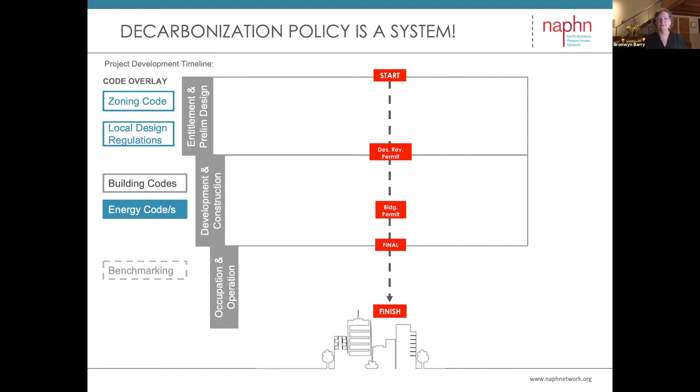So if we look at the typical code compliant building progression, it's everything that any architect or owner and developer and policymaker is familiar with, the typical phases of project development. And what I'm really wanting to point out is where the energy codes and these policies actually intervene in this development timeline. And for typical code compliant buildings, in most regions, the energy code really only affects a building right before a building permit is pulled.

Some projects might push this a little bit further up the development time frame, but for the most part, we know that energy codes really are only required to be developed and calculated right before a building permit is pulled. And if we then look at how passive house buildings are developed and where the passive house energy model intervenes in the system and the time scale for how projects are developed, we see a little variation.

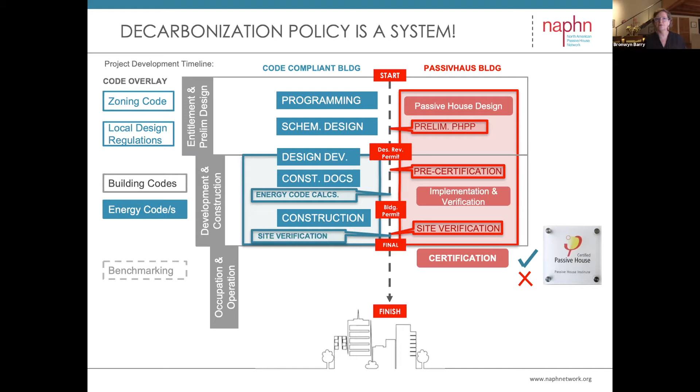So the other upstream intervention that we absolutely have to review and should not be left out of this discussion is the zoning code overlay. Any decarbonization policy that does not look at how land use is distributed and regulated is missing a huge opportunity to decarbonize their built environment simply by allowing more density to be developed. And this is a really simple function: the more disjointed and disconnected your buildings are from each other, the more insulation they require.

So your detached single family homes, forms that are broken up and have a lot more surface to volume ratio, actually require much more energy to operate, and they require more insulation. So a very simple lever for decarbonization that can have a huge impact on your built environment would be to simply allow higher density, more compact buildings, and for them to be ganged up together as in multifamily buildings.

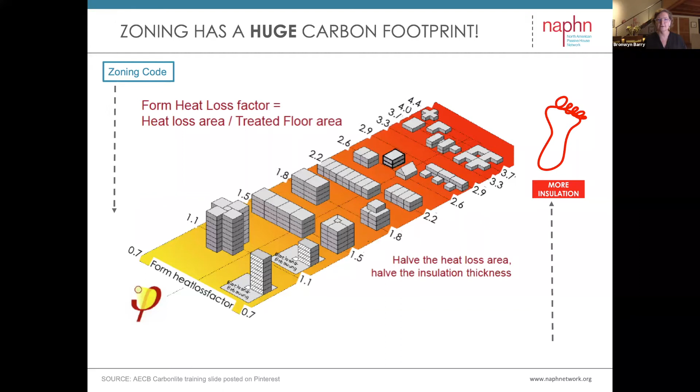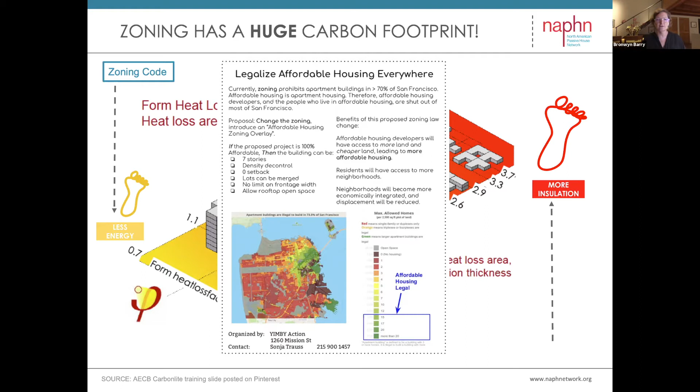And just to illustrate the point, this is my city, San Francisco, and San Francisco is one of the better cities in North America, and yet we still only allow multifamily buildings to be built in less than 30% of the area of our city. So this drastically alters the opportunity for us to decarbonize. And in our policy resource guide, Matt Hutchins wrote a fantastic article about this exact topic. And although it may not be specific to passive house, it greatly affects how efficient and cost effective passive house buildings can be. So start always with zoning.

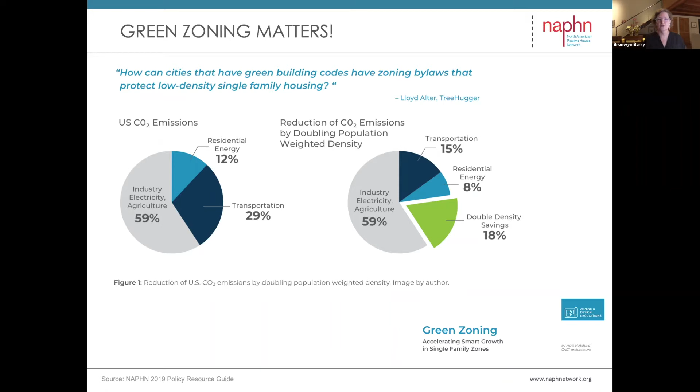This graphic that he included in his article shows how not only can you double the savings if you double the density for your housing, but you actually can also halve the transportation footprint. So the CO2 emissions from transport actually also benefit. And it is this doubling and coupling of efficiencies that again is something I will touch on a little further in this presentation.

And I'm always amazed that this is never required to be reviewed through a carbon emissions lens. And for the most part, what I see is these local design regulations that give guidelines for creating these completely disjointed, overly articulated boxes are actually sabotaging all the other good work that you are attempting to achieve in your building energy codes. So make sure that you aren't killing your carbon action plans by having your well-intentioned planning and local design guidelines folks really requiring all of this ridiculous articulation.

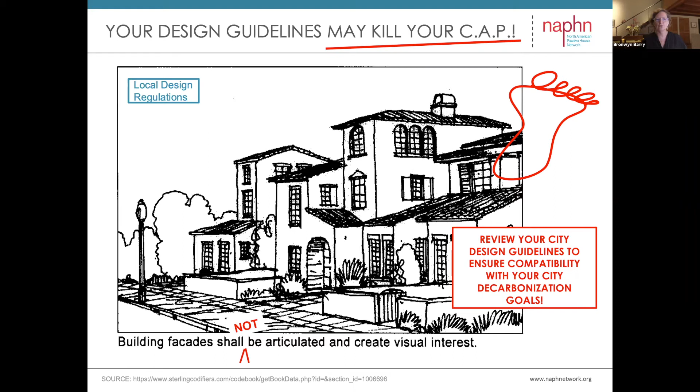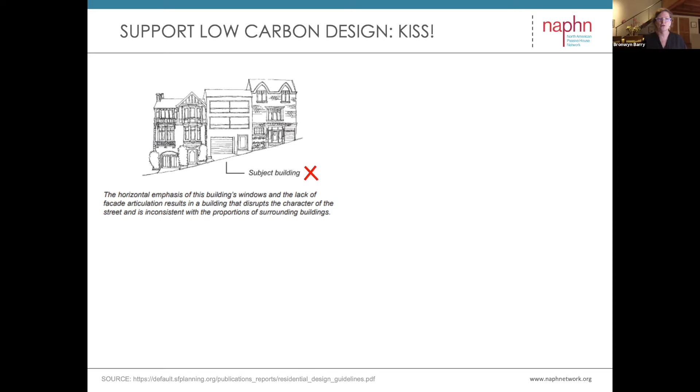And again, this is what's required in San Francisco. The design guidelines show this subject building as the unsupported version, but the version that they are encouraging architects to deliver is also actually horrendous. If you recall the slide I showed with how complexity and additional surface to volume ratio really increases the amount of insulation required and the amount of energy used, this is really not a good idea.

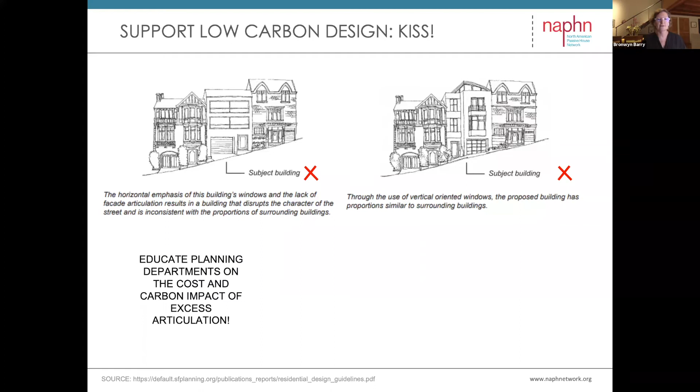So I encourage you and I urge you to make sure you educate your planning departments on the cost and the carbon impact of excess articulation. And perhaps there is a third way that can be found that still does create a unified, integrated neighborhood character, but really this may not be the best design that I can create with the PowerPoint shapes tools. But really the point I'm trying to make here is find a third way, keep it simple, and make sure your design review guidelines are also viewed through a carbon emissions lens.

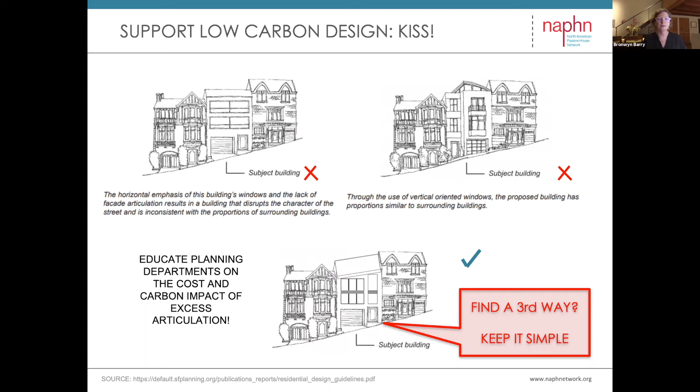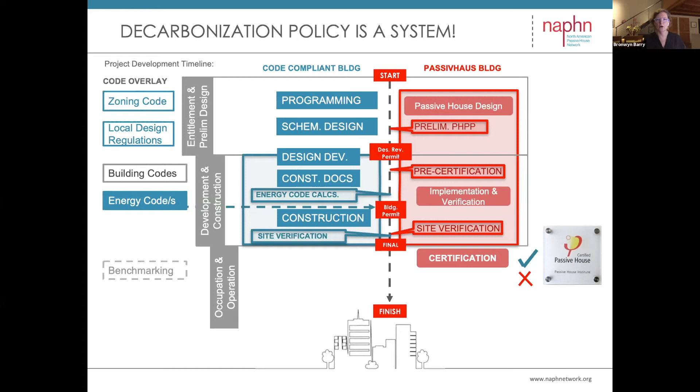So the point and the structure I'm trying to build here is to really start to look at our policies in a completely holistic and integrated way. And so not just in a vertical way, from start to finish of a typical project development milestones manner, but I would also like to look at our codes horizontally. So dig a little bit deeper, and today I'm really going to focus specifically on the energy code development structure because it's instructive and actually reveals quite a lot of additional potential barriers and hazards.

So I'm going to be using California's own energy code, which is called Title 24, Part 6, and it falls under the framework of the California Energy Commission, who have been fantastic in keeping California's energy consumption at a pretty excellent level in comparison to many other regions here in North America. And the framework I'll be looking at is pretty similar to what is used by the International Code Council. And for the most part, the same structure applies to the ASHRAE 90.1 energy code, which is used for most commercial buildings here in North America. And this may vary slightly from your own policy and energy code framework, but I think for the most part, they all are structured fairly similarly.

So how code is developed in California is each of the elements that are included in our energy code review are reviewed in specific framework meetings, and they are focused on separately. So workshops are held over the course of a 3-year code development cycle, focusing on the specific elements of buildings, and each is, for the most part, reviewed separately. So for somebody like myself that has been looking at how to intervene in the code and use the energy code cycle to include passive house elements, it's been a real challenge, and we'll look at why that may be further down the line.

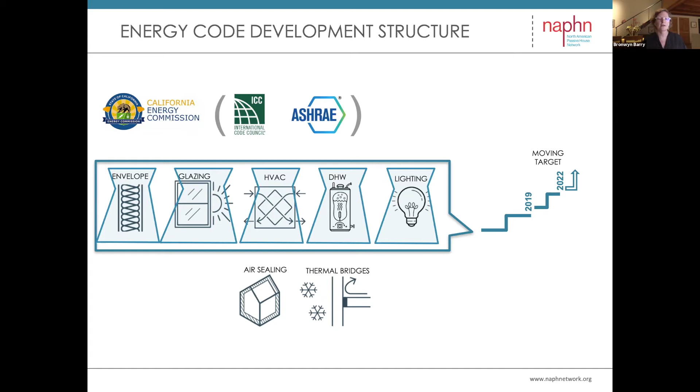And once all of the elements have been reviewed and modified and improvements to each of these categories have been determined, they're all then plugged into the energy model. And each 3-year cycle, the improvement for the energy efficiency is ratcheted up slightly.

And the goal of the California's Title 24 Energy Code, and for most of these other codes, the goal is cost-effective energy efficiency. And this is important to remember. So keep that in mind, what the goal is.

And if we summarize how the code is structured, the other elements that we also should consider is the California Energy Code uses a benchmark building as its baseline. So your building is always compared to this benchmark building, and your building is required to achieve a percentage better than this benchmark building.

So it's never really looked at for its own specific efficiency, but simply in a comparison framework against this, how shall we say, fantastical building that has been determined as the baseline conventional building common to your building type.

As I mentioned earlier, the code is also updated every 3 years. So it is a 3-year code cycle with the codes issued and released and adopted. The last iteration that we're currently working on was issued in 2019 and formally implemented in January of 2020. And the next code cycle that is already being developed and reviewed is the 2022 code cycle.

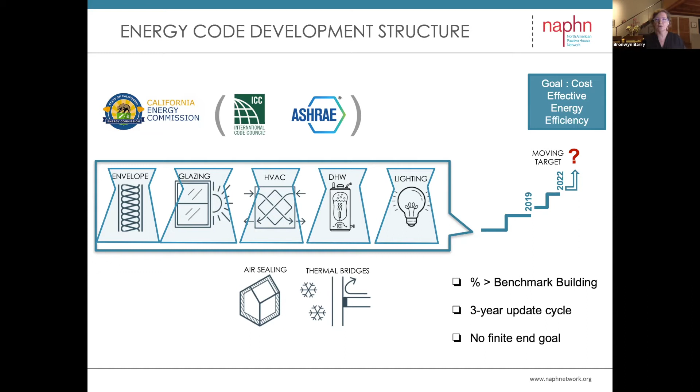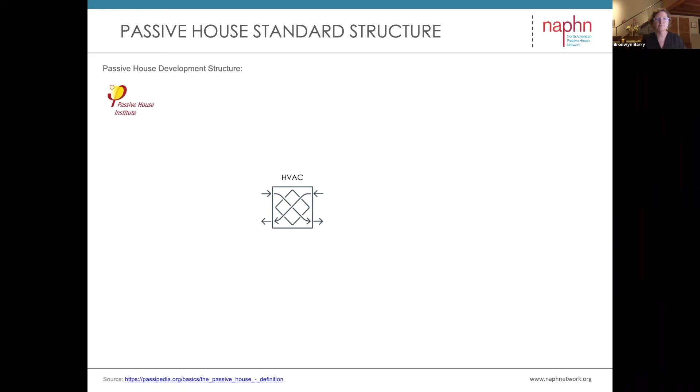So in comparison, the Passive House standard structure is a completely different animal. And at its core is this goal for hygiene ventilation. And it's really important to see how the Passive House standard structure works completely differently to our standard energy code framework. And Passive House is defined by the end goal.

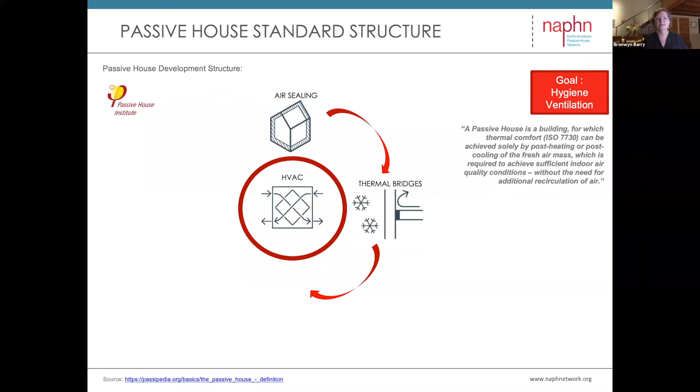And quite interestingly, coming back to the original definition of the Passive House Standard as one of requiring and meeting this hygiene ventilation target is extremely pertinent during this COVID pandemic time. And really what I'm trying to illustrate here is Passive House Standard works backwards, where it has actually defined this end target, and then all the other elements in a passive house building are reviewed and work backwards in service of meeting this hygiene ventilation target.

And lighting, plug loads, domestic hot water are also included in the Passive House Standard, but not as specifically as they are in our typical code framework. They are bucketed underneath the primary energy target, so they're more peripherally reviewed than they are in our standard code structure. And again, what I'm trying to graphically illustrate here is Passive House has a very fixed target.

And the model is specific to each building. So there's no benchmark comparison to and percentage improvement over. Each building is modeled to the exact specific design that it is built to.

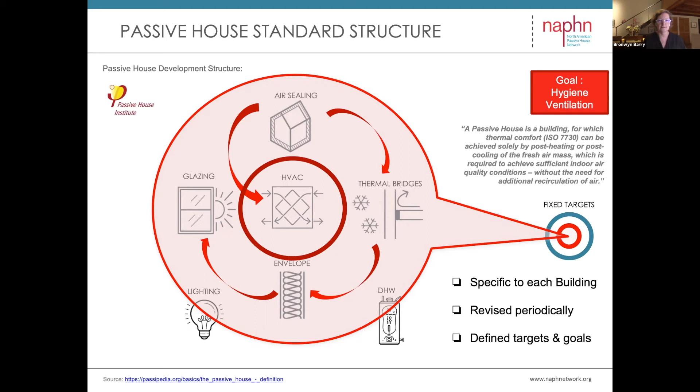It is revised periodically, and this is typically when the new version of the PHPP is issued. Updates to the algorithms are typically then issued. But again, the point I'm trying to illustrate here is the very different structure and framework for the Passive House development process. And it's really distinguished very clearly by these defined targets and very clear end goal.

So the million-dollar question I am always asked by policymakers is, how can we integrate Passive House into our code framework? And I have really struggled with this particular question about how to merge these, how to harmonize these, and looked very deeply into many of the specific elements included in our code.

But the conclusion that I have reached is perhaps that is the wrong question to ask, because, as I've tried to illustrate graphically, these are two very different animals. Trying to merge them and integrate them may not be the best pathway forward. And to be honest, because the end goals are also so different, merging them may not be the best pathway forward.

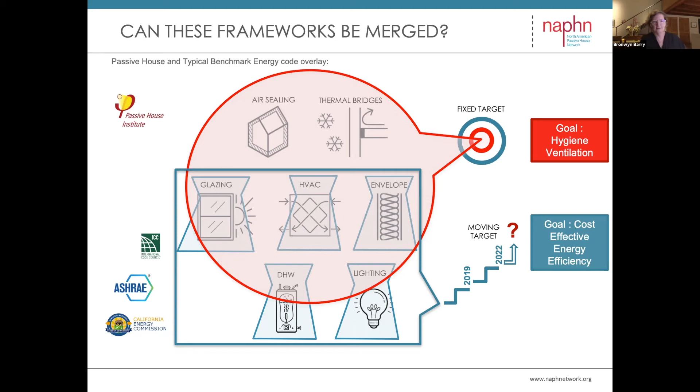So how do we harness the power of Passive House, and how can we utilize its unique framework to help drive conventional code and transform our built environment? And I've been enjoying using this particular slide quite a bit lately, because I want to show that every single one of us has seen the power and the efficiency that we can achieve by combining and integrating elements.

And what I'm seeing here, particularly in California, when we apply this to our built environment, we have all our disparate components of our buildings. So our hot water systems, our ventilation and energy recovery systems, and our heating and cooling systems. So this is a heat pump, a furnace.

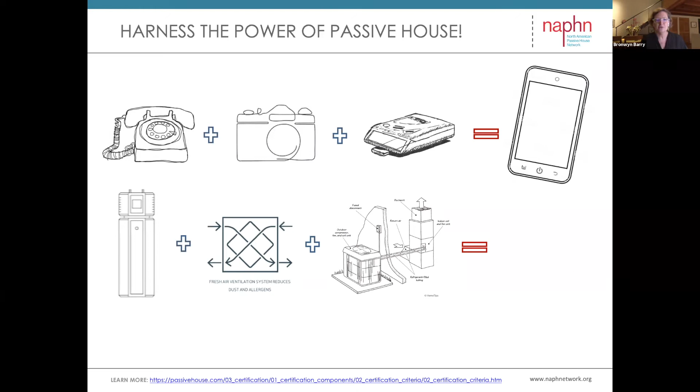And unfortunately, these all get put together in very separate categories. They're reviewed by our code as separate systems altogether. But in Passive House, we are able to actually achieve these amazing efficiencies by being able to look at all those systems and figure out how to combine them.

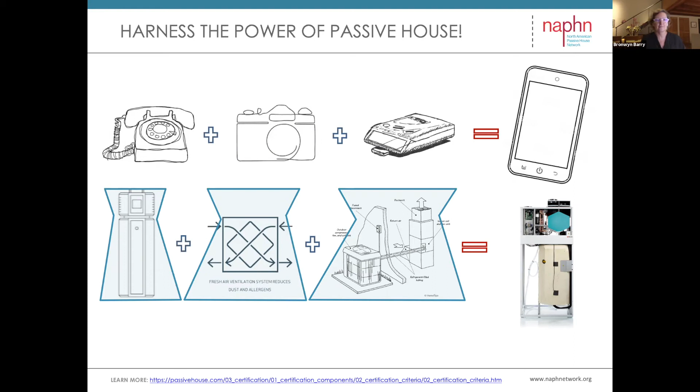So really, this is something that I think our conventional code development people and policymakers really need to look at carefully, because this is the essence of Passive House, is this ability to combine and integrate systems to create these order of magnitude better products that actually utilize all the disparate elements and integrate them in ways that actually can leapfrog over the conventional efficiencies now still routinely available on our market.

So my point I'm trying to make here is why, if we can utilize the integrated holistic approach embedded in the Passive House framework for building products, why can we also not do that for our policy?

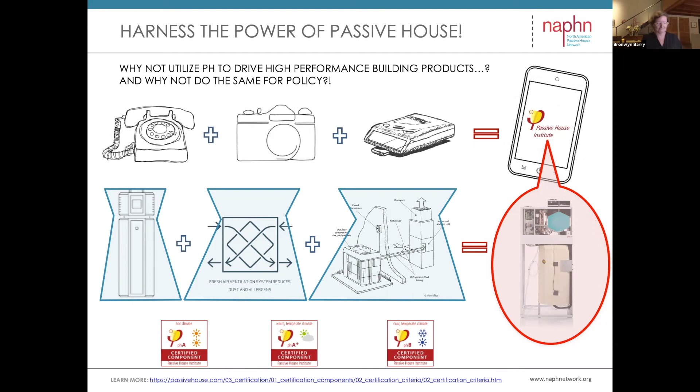So to recap where we have got to so far, what I've really tried to illustrate is that Passive House is an upstream intervention. And this upstream intervention actually can also be leveraged in many other of our code overlays and may really be the secret sauce of Passive House's success. I'm also showing that our zoning codes have the possibility to completely derail decarbonization policies if they are not also holistically reviewed and integrated into a decarbonization policy framework.

And the same for our local design regulations and guidelines. So I'm really urging you as policy advocates and policymakers to make sure that you don't forget those two huge levers available to you to transform your built environment. They cannot be looked at in isolation. Then I was also showing how your energy codes may not necessarily align with Passive House's holistic approach, and trying to merge and integrate them may not be your best path forward.

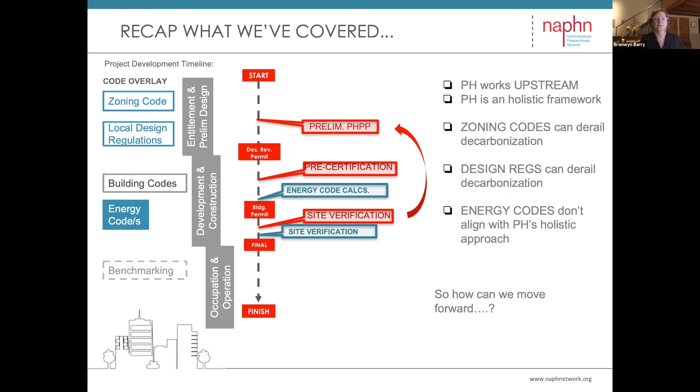So what are the opportunities for us to utilize Passive House, and how can you leverage its holistic framework to help transform your built environment? And I would like to use specific examples where this has been successful, and break down the specific policies that they've utilized to transform their built environment. And of course, Brussels has been since early 2004 the poster child of this transition.

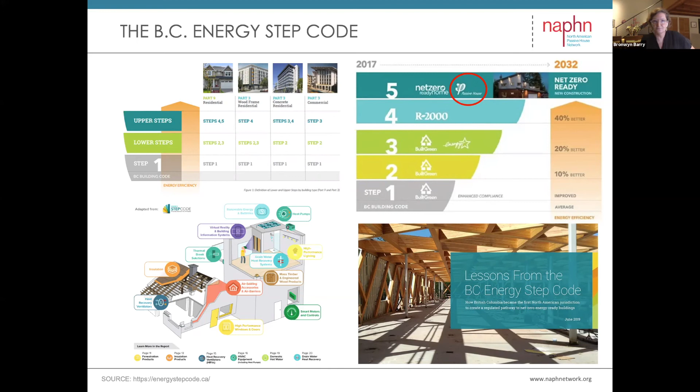And this same framework is now being replicated in other parts across North America extremely successfully. So British Columbia, with Vancouver being the catalyst, was the first. And this same framework and the step code is now being replicated and rolling out across all the other provinces in Canada. Toronto is doing amazing things with Passive House that hopefully other presenters in your conference were able to share details with you about.

New York State is also an incredibly savvy front runner, with NYSERDA really leading the charge and utilizing these same framework principles that were implemented in Brussels. And more recently, the state of Massachusetts with their Mass Save program is doing all the same, pulling all the same levers as Brussels did and replicating this same industry transformation framework.

NYSERDA's early workforce training and development funding grant was particularly successful, and I wrote about this in the policy resource guide, identifying what were the successful elements of that funding program. It was actually a very small amount of money allocated over two years, a year and a half really, and distributed to professionals, not only taking Passive House training, but other high performance training programs.

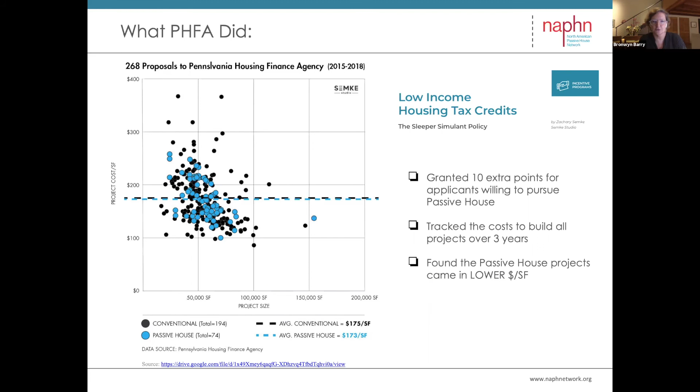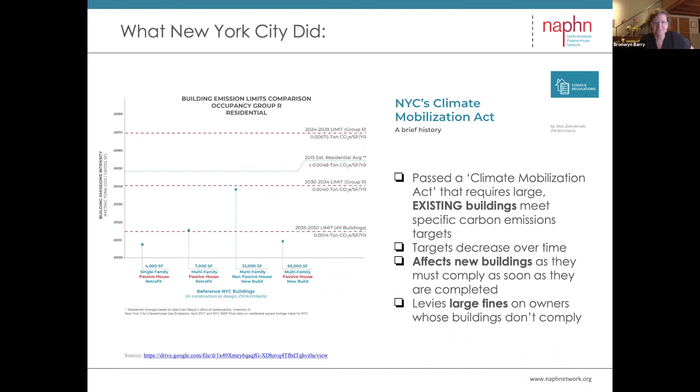And then the last policy attempt that I'm going to cover is the one that I was quite involved with here in California, where we attempted to utilize our existing REACH code structure to develop a passive house REACH code for low-rise multifamily buildings. We specifically targeted low-rise multifamily buildings for all the reasons I have already illustrated and shared with you previously. And we developed this REACH code in partnership with the city of Santa Monica, who was the initiator of this REACH code, because they came to us and said, hey, we do want to see how we can incorporate passive house into our codes.

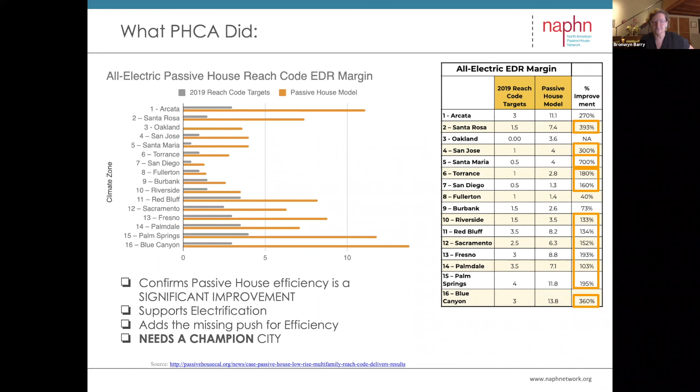And so therefore I would sadly say, don't bother. See if you can find other ways to work around your code for all the reasons that I have outlined here in this presentation. So to summarize what I have shared with you, really best practices and opportunities for utilizing passive house in your advocacy and policy efforts.

It's really a pretty simple formula, which Brussels and Vancouver, New York State and Massachusetts are all utilizing, this exact same formula: start by identifying the leaders. And these will always include passive house proponents and professionals, but most certainly there are others out there who are not utilizing passive house that are also being similarly innovative and should be included. Then set a clear target.

As we've seen, and what I'm coming to see more and more, perhaps that is really the secret sauce of passive house: it just makes it very clear what you are asking of your project teams to deliver, whereas our current code framework really is very nebulous in that regard and doesn't set a very clear end goal, and in fact doesn't have one.